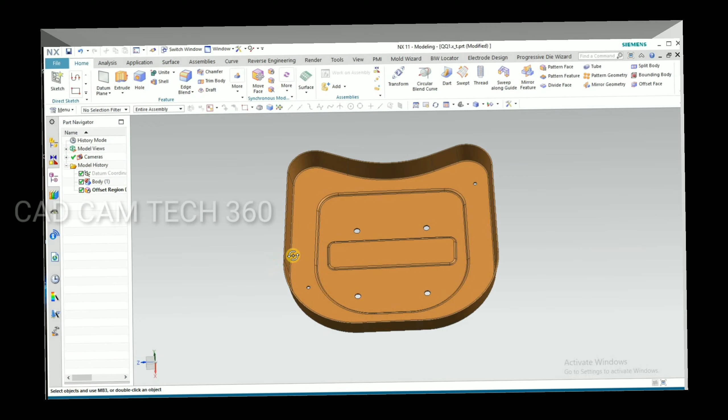Hello guys, this is a sheet metal part which we are going to make a punch and die using this part. Okay, let's start.

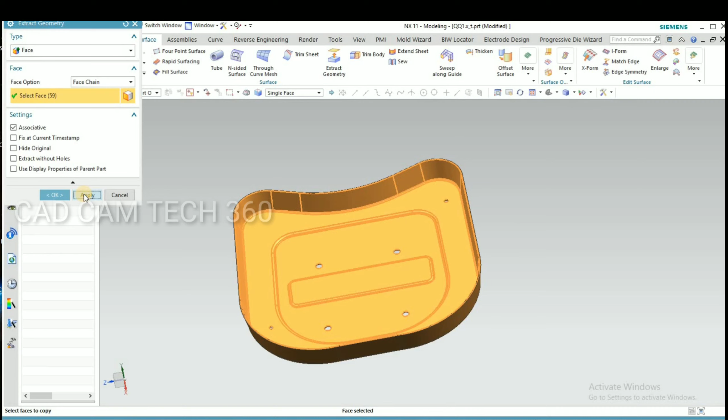Here go to surface and select extract geometry. Select this punch side skin and apply. Next what I'll do is hide the sheet metal part. Now only the sheet is appearing, zero thickness of sheet.

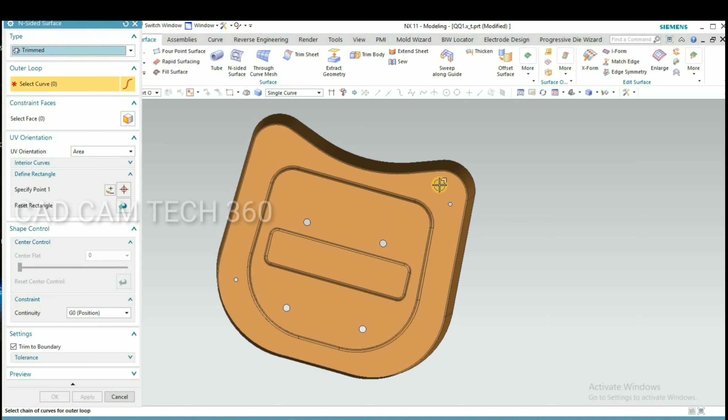By using this I'm going to hide this hole. Okay, like this we have to select and apply one by one.

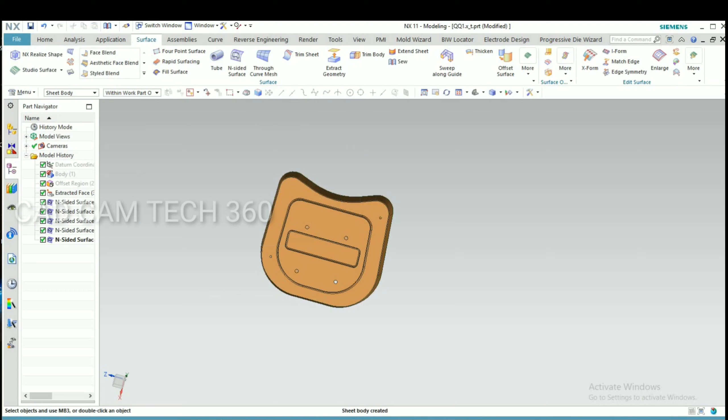Then go to sew and make it a single object. Okay, yeah, here one more hole is there. Again go to N-sided surface, select this and sew it.

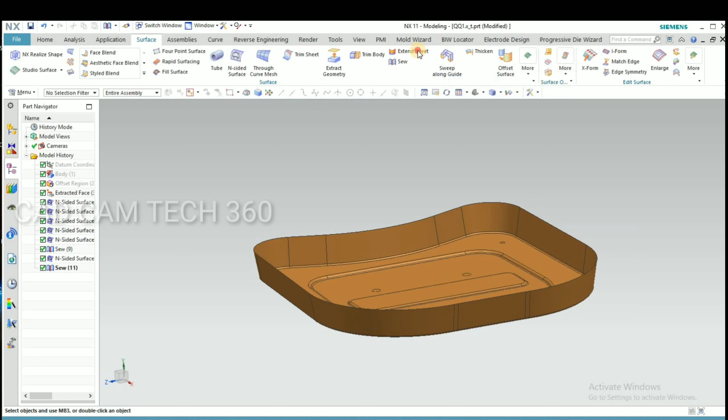Okay, then go for extend sheet, select like this and okay.

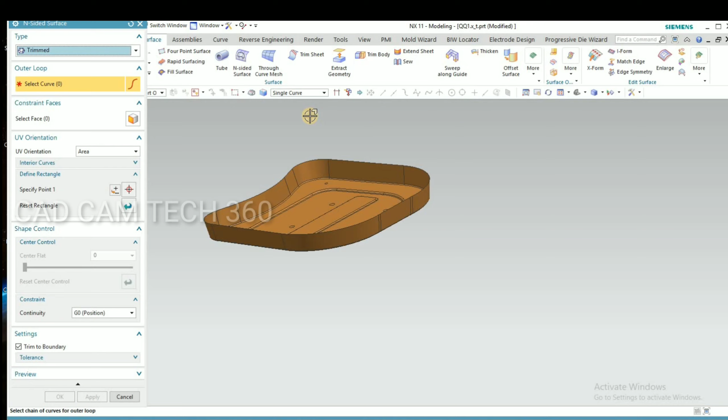Go for N-sided surface, select like this one by one.

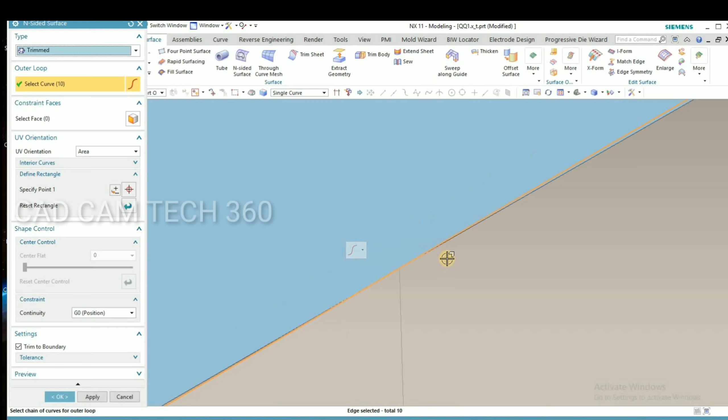Yeah, here one more curve is there. Okay, we have to select like this. Small curve also we have to select, then only we can get a solid object.

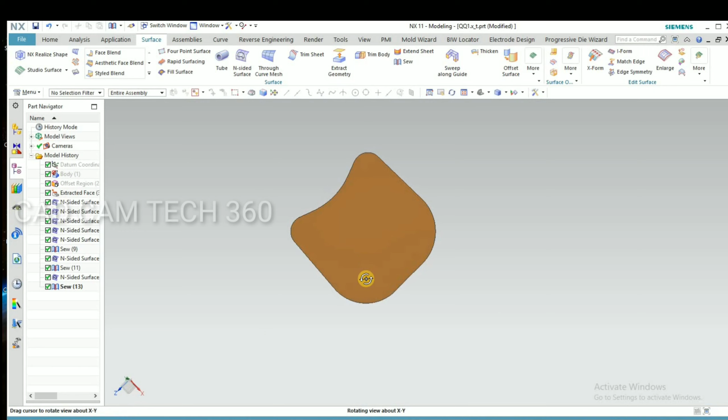Okay, we have selected all, then go for sew and select all. It will become a single object and solid. We can check it. Yeah, it has become solid.

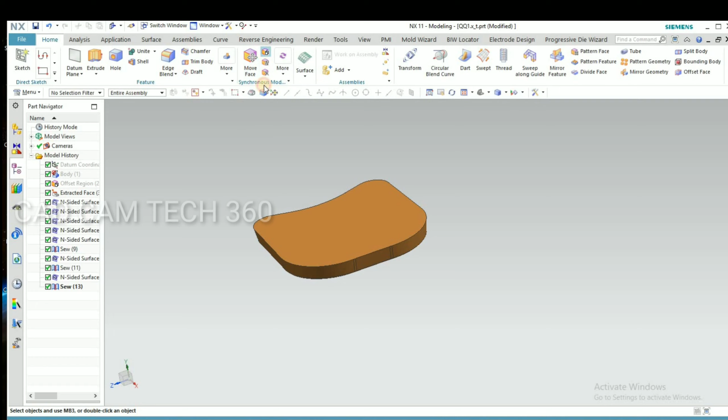Okay, we have created a punch. I'm going to offset it a little bit, then I'm going to change the color. Okay, it looks good.

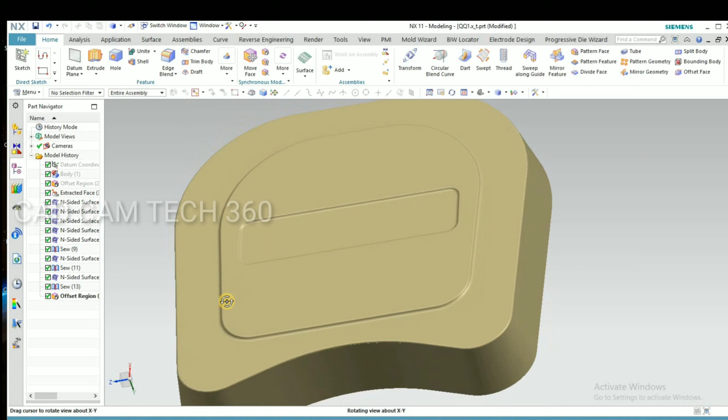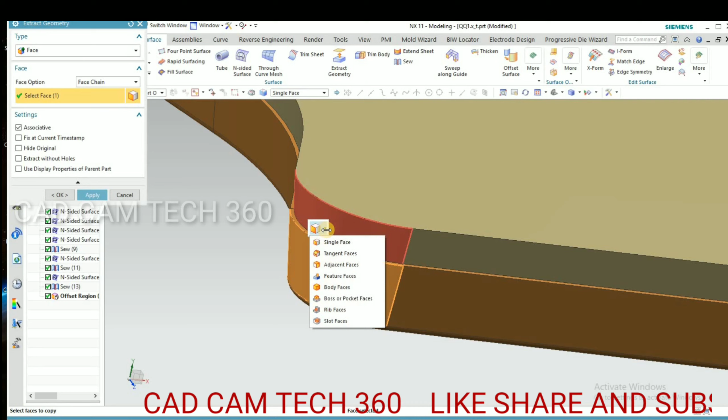Then I bring back the part. Okay, then go for surface and again select your outside skin.

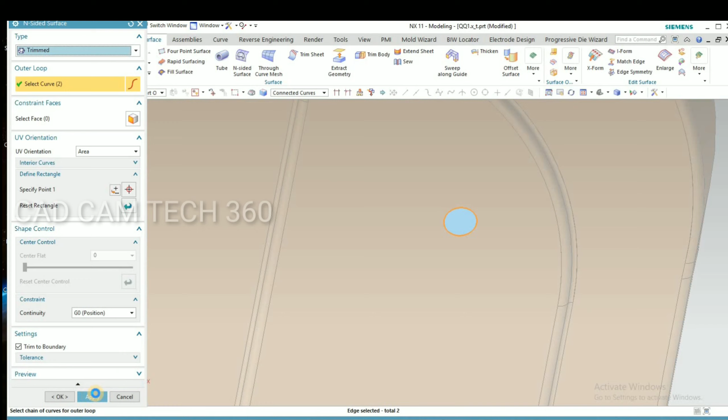To make a die, same thing as well, hide the hole. Okay, like this we have to select one by one.

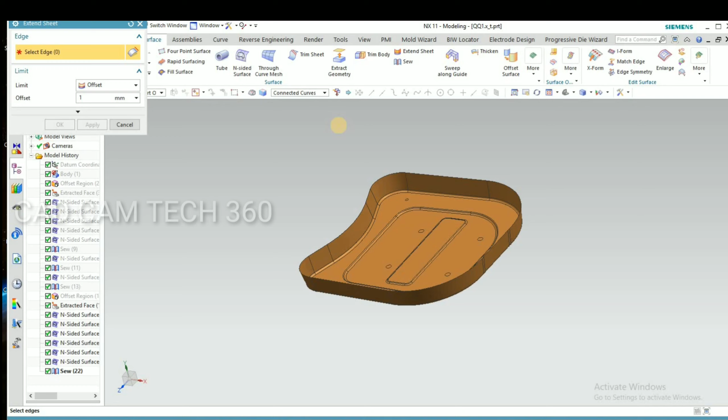Then select sew and make it a single. And extend this, yeah.

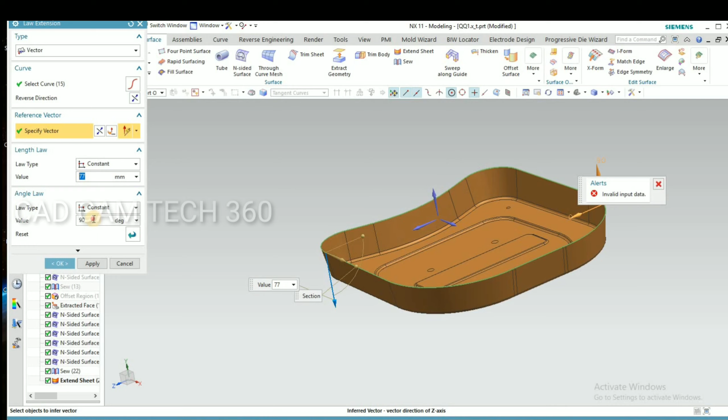Then select your law extension and select this outside curve and also select the direction. Here we have to give angle and distance.

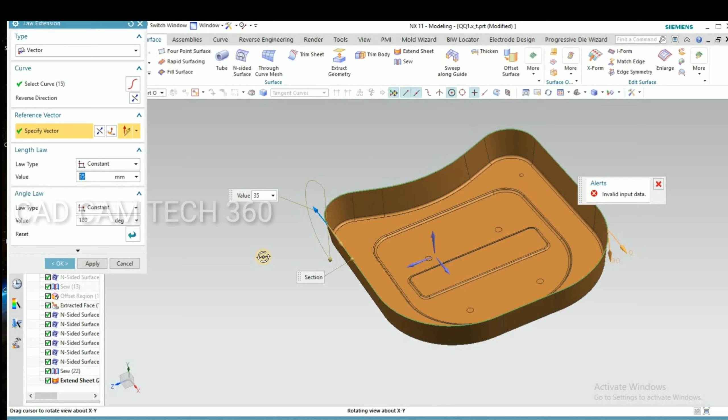Okay, it will not take. I select Z direction and top one. Yeah, we got it.

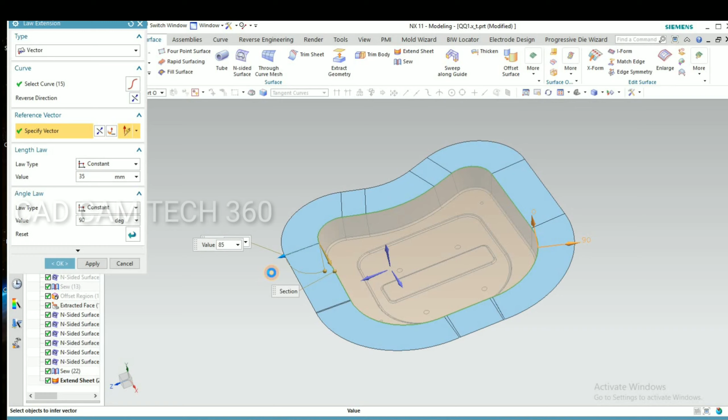Then here I'm going to change the angle and distance a little bit. I draw it like this. Okay, it is perfect.

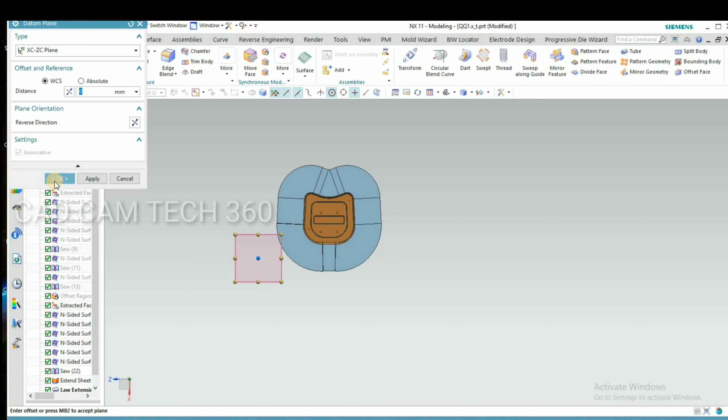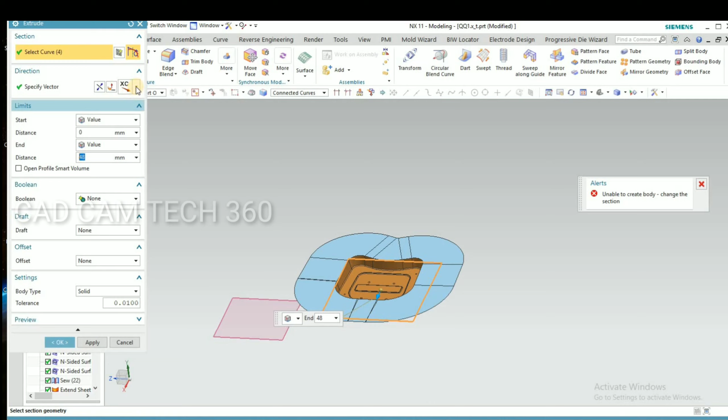Then yeah, we select this plane and draw a rectangle here. Okay, go to finish sketch and here we have to make a solid body.

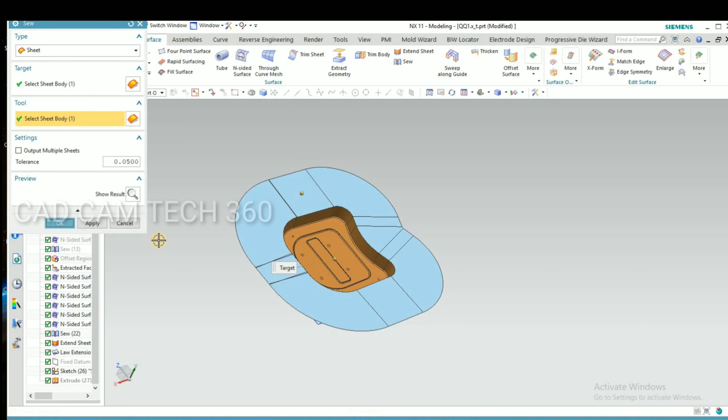Okay, go to hide hole and go to sew and make it a single. Okay, it becomes a single object and bring back the solid block.

Then go to split body and select this and change direction. Okay, yeah, this is the die.

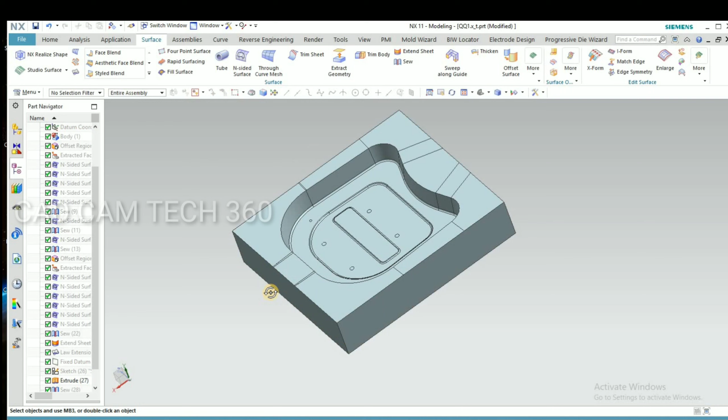Okay, bring back a part and I go to sketch and draw here one line.

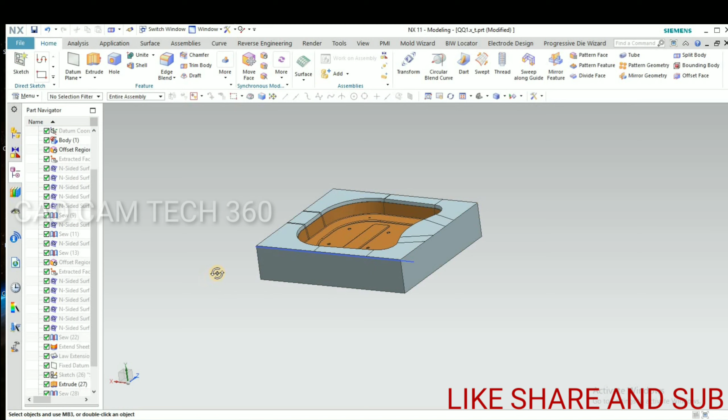And I am going to split in the top portion of the die. Select direction and apply. Okay, it is split.

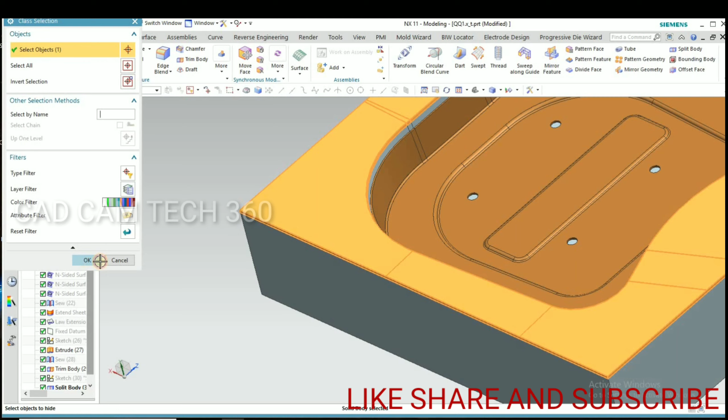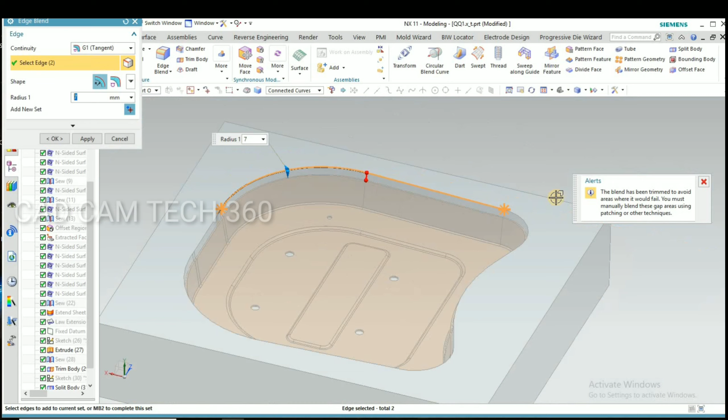I am going to hide this and now I can give a radius. Yeah, these corners. Okay, we have to select one by one like this.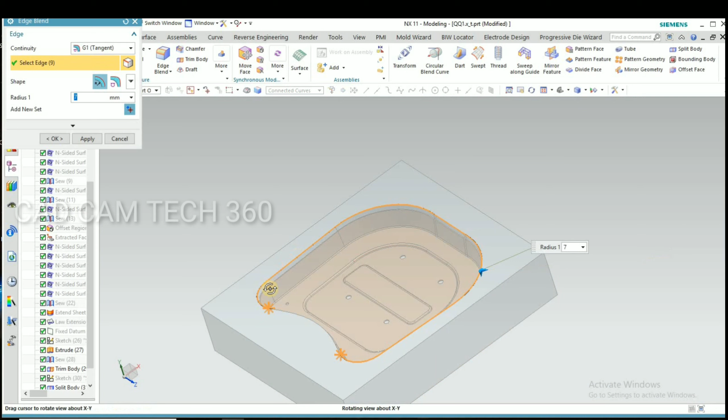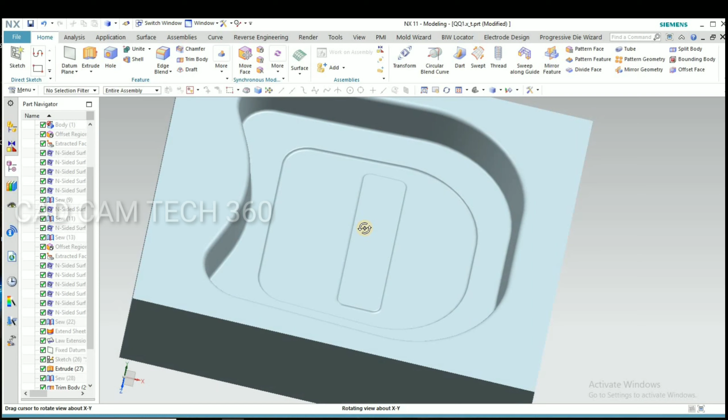Okay, this is the die and I change the color.

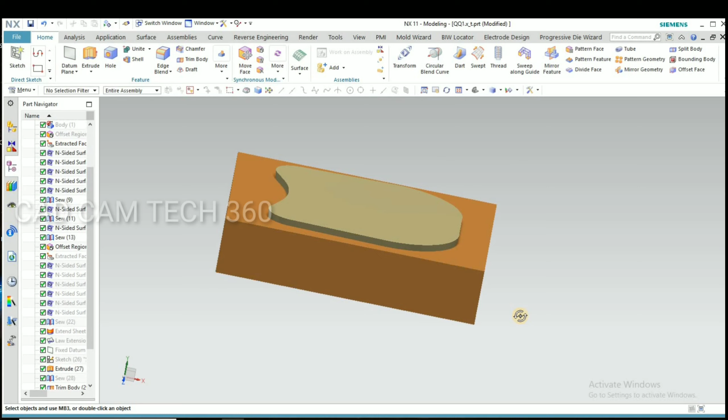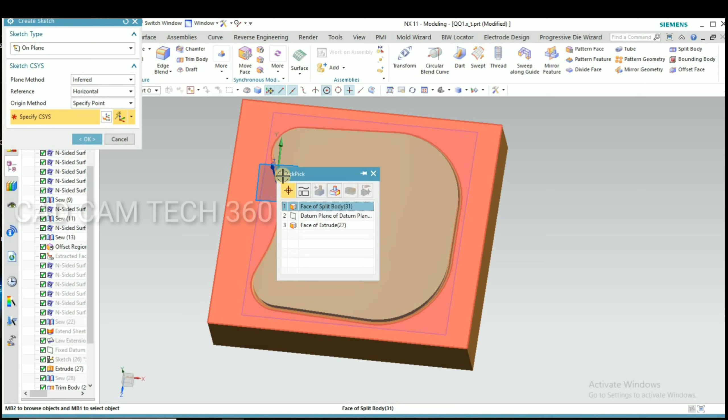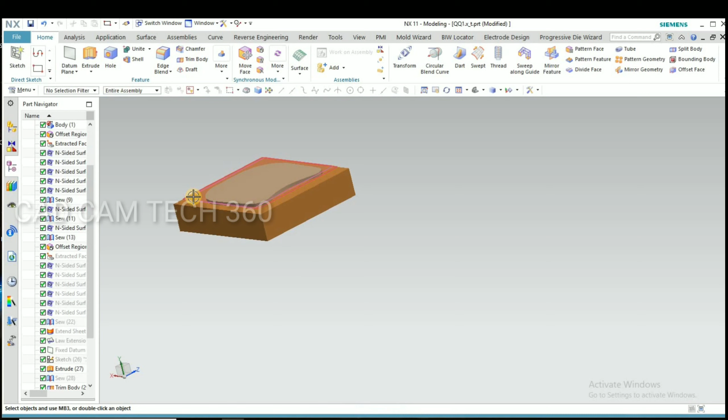Okay, bring back the part and here I make a rectangle and select this. Okay, go to finish sketch and extrude.

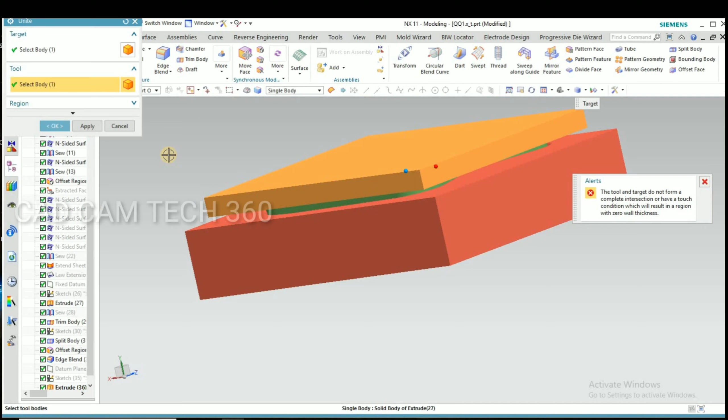Okay, almost we have completed this session. Make it a single body. Here we have to offset, then we can give unite.